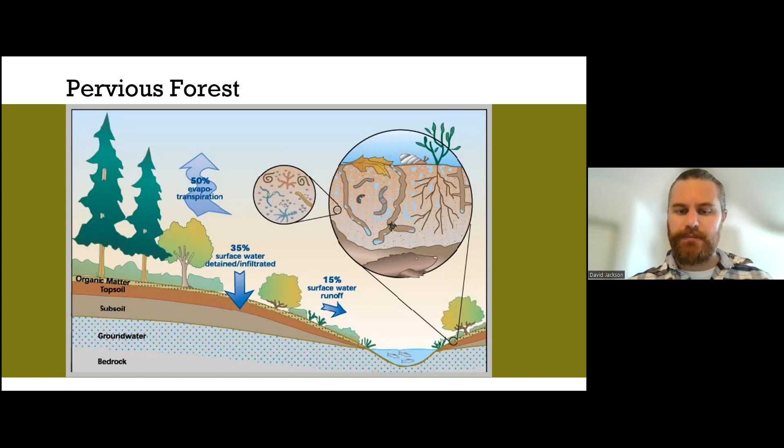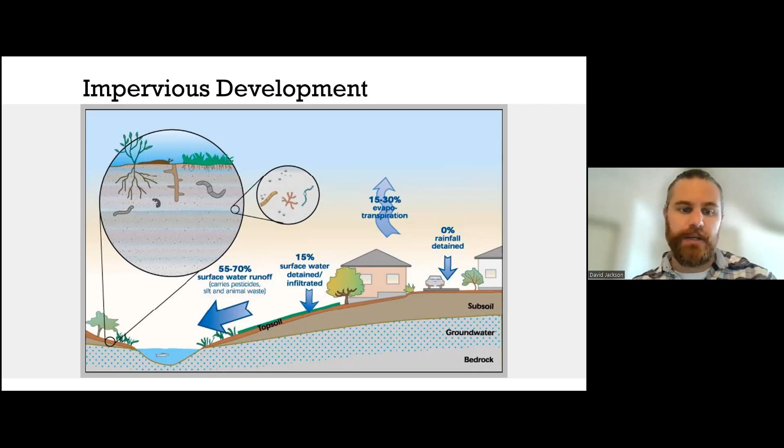Water's supposed to go in rivers. Why is that an issue? Well, when rainwater in particular falls from the sky and flows into and is channeled into waterways, that can cause a number of issues. Flooding is a big one. If the groundwater isn't holding that soil, if plants aren't holding that soil, it means that a lot more water is going into those waterways.

And if those waterways become full, and by full we mean either overflowing themselves or at least as high as the outfall, meaning the water level is above whatever pipe is putting stormwater into it, you have systems back up, you have flooding. We've had one of the wettest Junes that we've had recently, and part of what has been causing problems is the water has been falling in a large amount very quickly. And we don't always have the best systems to make sure that lots of water can go where it needs to go. Another issue is erosion.

Water runs over soil and will take soil with it, and will cause erosion of waterways. It will cause erosion of any other place that isn't stabilized, either through green or gray means. We like to say around the conservation district that water always wins. And if you don't believe us, ask the Grand Canyon. Fast moving water in large quantities can move a lot of soil, and especially in our developed areas, when soil starts moving where we don't want it to go, it causes a big problem.

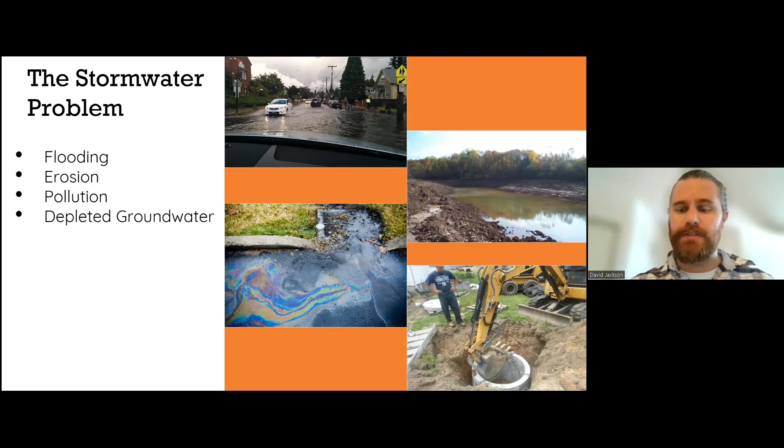And then finally, it causes an issue because if it's not going into the soil, it's depleting the groundwater. It goes straight over the top of the soil and into rivers and on its way. That becomes a real issue for people who rely on groundwater, primarily through wells, for water in their homes. Becomes a much bigger issue for things like agriculture. So stormwater is a problem in several contexts. It's not just about where it goes, it's about how it gets there. So that's where detention ponds come in.

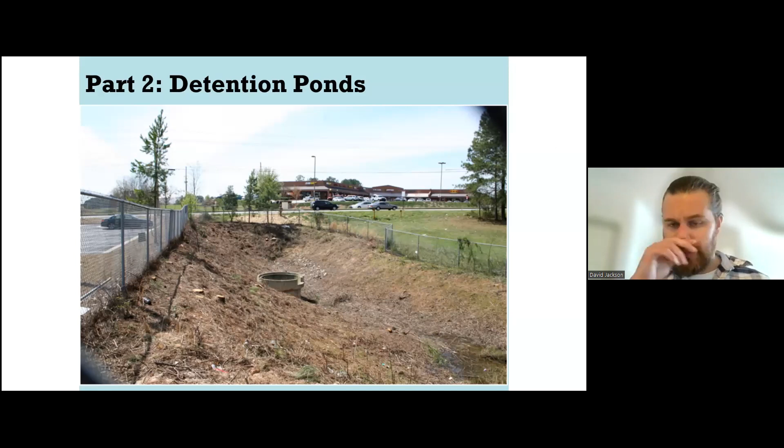Detention ponds are artificial structures that contain water. They contain stormwater, so water comes from other places, namely through what we call conveyance, catch basins, and it's put into these ponds to either be retained or detained, and eventually handled in a more natural way, which keeps these issues from happening, the flooding, the pollution, the erosion. So a quick overview of detention ponds, and the rest of this thing is going to be talking about detention ponds. So don't worry if you don't feel like after this slide you have a full understanding. We're going to talk about it at length. But some quick facts to give you some context.

There are wet and dry detention ponds. They're commonly called detention ponds or retention ponds. However, some ponds have both. They will have what's called a wet cell and a dry cell. We're going to be talking about detention and retention differently and what different levels of maintenance takes, because your pond may have both. They are part of environmental protection. They're not just things that keep water out of your way. They're also there to make sure that stormwater runoff doesn't impact the environment in severely negative ways. Treatment is part of the function of the detention pond. We're going to talk about that a little later as well.

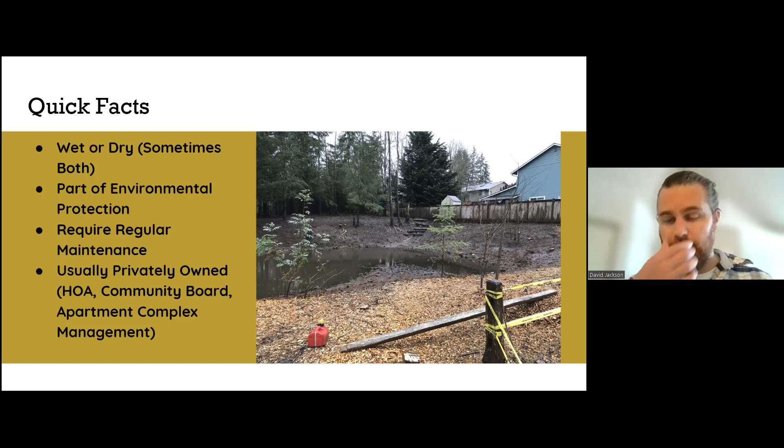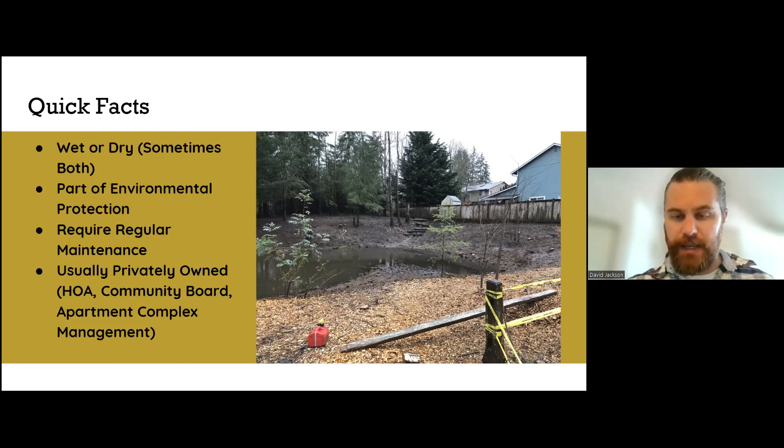They do require regular maintenance. They have vegetation. They have a number of systems that are involved in their good function. And like any machine or like any installation, maintenance is necessary. And for the most part, they are privately owned. There's a little bit of a myth that the city owns all the detention ponds. The city often will own some, but for the most part, they are privately owned, and they are built as part of a development, and then that developer transfers ownership to an HOA, a community board, or in some cases, apartment complex management. So I mentioned conveyance, so we're going to start there. We're going to start at the sort of top of the system.

Water flows into these, and then it usually settles there for a small amount of time, and then the water is conveyed through a pipe to a stormwater control facility. The reason that these exist is, one, to create the inlet to the conveyance system, but also to start the treatment process. These have what are called sumps, which is space at the bottom for sediment and debris and things to settle down into the bottom so that they don't end up in whatever the treatment facility is. These also require cleaning, but we're not going to talk about that too much today.

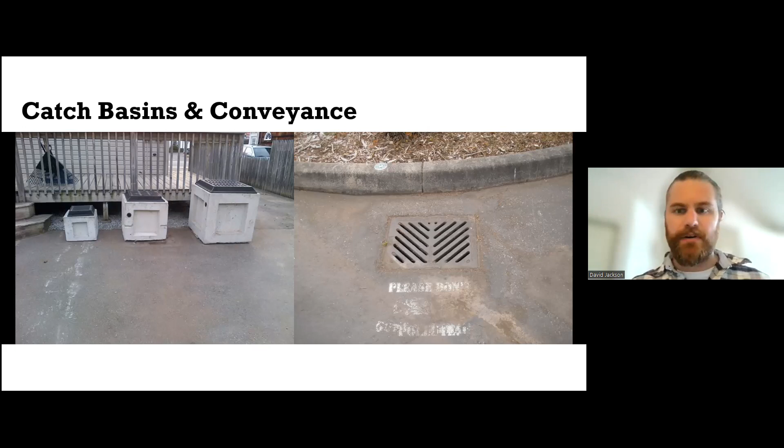But this is the start of the system. So if you're wondering, well, how does the water even get here? And you're walking around your neighborhood and you see one of these, this is where it all begins.

So I mentioned detention versus retention. We're going to talk a little bit about what the difference is. You can think about it in terms of high school, as I think none of us really do, but this is my favorite way to approach it. If you get detention in school, what does that mean? I realize you can't answer, so this is rhetorical, don't worry. Detention means that you are held after for a period of time instead of going home early or going to recess or doing something else. You are held for a relatively short amount of time, and then you're released.

That is a detention pond. This is also called a dry cell or a dry pond. Water is not supposed to be here long term. It's supposed to hold water temporarily and discharge it. A retention pond, going back to the school analogy, when they talk about student retention, they mean how do we keep kids in school long term or until they finish their education?

Retention ponds are also called wet ponds or wet cells. They are pretty much always supposed to have water. They are more like small lakes than anything, but they are still designed with capacity so that that water level will rise during a storm event, and after it dries out, will drop again. So that's the difference between detention versus retention.

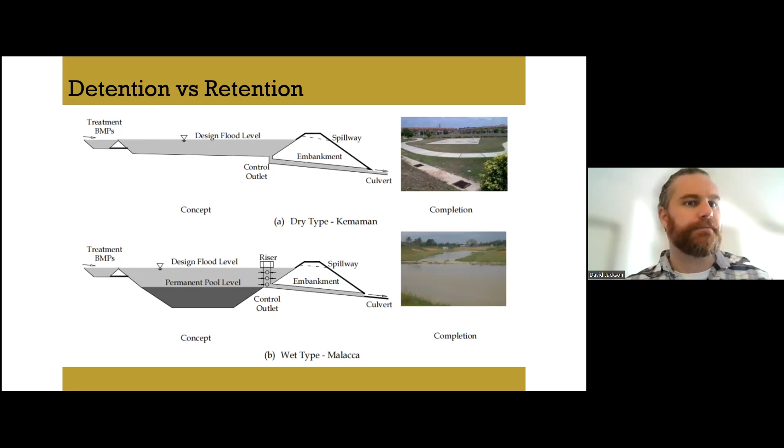So you can think, is the pond I have just keeping kids after school, or is it trying to keep kids in school indefinitely? If that doesn't work for you, I'm not going to feel insulted, but that's the way it works for me.

So since we're talking about detention ponds primarily, we're going to talk a little bit about what a detention pond is. Almost all detention ponds will have some kind of access ramp. This is required, because it is absolutely essential that people be able to get into detention ponds to do maintenance, inspections, all sorts of things. It will also have an inlet, which is where the water enters from the conveyance system, like those catch basins we showed earlier. It will have an outlet, meaning this is where water flows out.

The level of the outlet may depend on if it's an overflow or if it's intended to be constantly flowing out to a treatment facility. In some cases, the detention pond is the treatment facility, and they only have the outlet to flow out in case of a really heavy storm so that the pond doesn't get overwhelmed. It has a pond bottom, and that's either wet or dry.

Again, detention versus retention. It will have an emergency overflow, even if it has a normal outlet that is constantly letting water flow out. It will also have an additional emergency overflow that will allow it to convey more water in the event of a really heavy rain event. It also may potentially have a control structure.

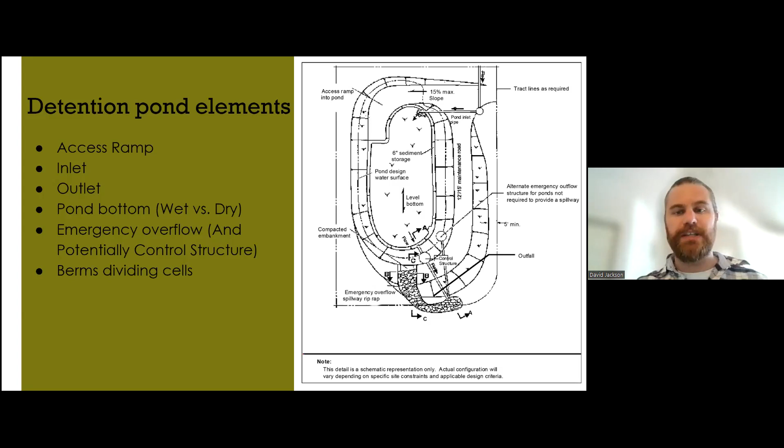If it does have a control structure, this is something that we'll talk about a little bit later, about what a control structure is and how it works. And then it will have berms dividing cells. If it's just one cell, it'll just have a berm around the entire thing. If it's two cells, a wet cell and a dry cell, or two wet cells, or however that works out, it will have berms dividing those areas because it wants to do different things at different points.

So a control structure, and this is one of those things that please do not try to catch all of this stuff. This is just an example of what a control structure looks like so you can sort of recognize one. A control structure is really there to control the outflow of water. It wants to ensure that a certain amount of water flows out if necessary, and controls where it flows to. But it wants to make sure that those more simple systems are not overwhelmed.

You do not need to know a lot about control structures, because if you have a control structure, it basically guarantees that you are not going to do the maintenance on it yourself. There's a number of reasons why that we'll talk about in the maintenance section, but recognize that if you have a control structure, you should not be messing around with it. They can be very, very dangerous, and you want a contractor to mess with it. So recognize a control structure as something that you should not go sticking your nose into.

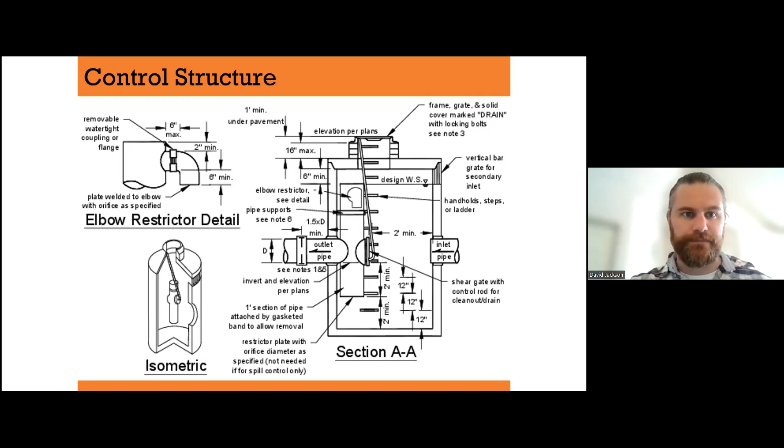Fencing and security. Fences are generally required when there is a certain slope to ensure that people don't trip or fall in. It's also, like in this case, more there to make sure that the kids don't muck around in this, and to reduce individual liability. Most places, especially developers, will go ahead and just toss a fence up around these things anyway, because it reduces their liability. It's easier than trying to fuss about how this is going to work. So it's so much easier just to go ahead and toss up a chain link fence.

This does have some drawbacks. A colleague of mine used to refer to these as, oh shoot, what was the word he used? Kari may remember. I think it was stormwater prisons, because they look like these incarceration facilities that are terrible and dangerous and off limits. That again, you kind of have to balance, like, do we want this thing to be completely shut off because it's dangerous, or do we want it to sort of look friendly?

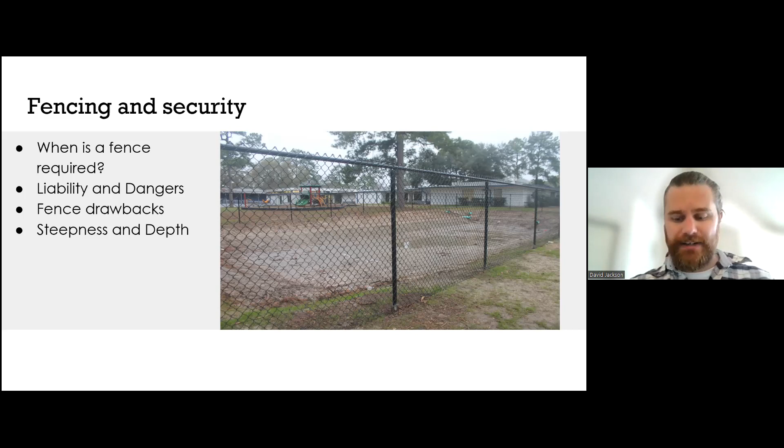I can't answer that blanket; it's really a case by case basis, and you also generally need to talk to an engineer about that to make sure that your slopes are a certain way, and you need to check your city and county ordinances to make sure that your fencing is compliant. In general, it is safer to have. In general, fences will be required because detention ponds are not playgrounds. They can be very dangerous places.

And then it will include plants. My personal favorite part of them. Again, this is nothing you need to memorize. This table that you see here comes from the Snohomish County Drainage Manual, Volume 6, which was reviewed by Ecology and I believe adopted in 2020. There are a number of different types of plants which can be used. Different than typical landscaping, they're going to be organized based on the amount of inundation, that is the amount of standing water that they can generally handle.

So up here at the top, we have inundation to 1 foot, meaning that these plants handle standing water only for a temporary period of time, about a foot up. Underneath, you have 1 to 2 feet, and below that, you have 1 to 3 feet. This is not the whole table. It goes on for a little while. But I wanted you to see an example of this so you can see, oh, I should plant these higher up on a slope, or I should plant these lower down.

That's if you're going to be planting, or having somebody plant in your detention pond. Primarily what you see in detention ponds are grasses. Some places do have trees and shrubs.

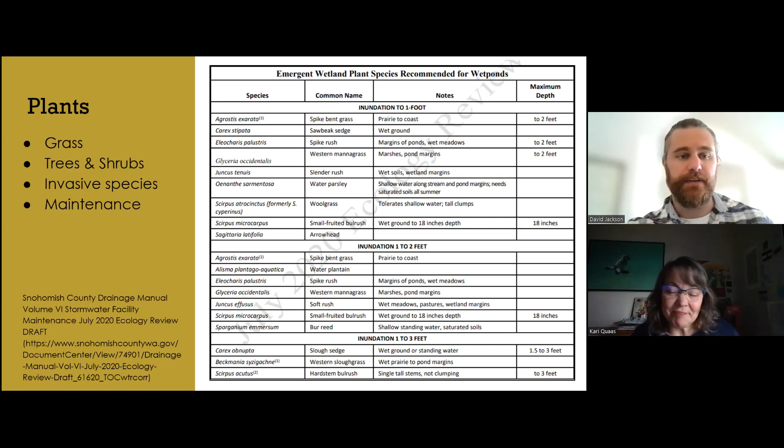Yeah. Sometimes your voice sort of fades out, like you're in an echo chamber. Okay. No, I will speak up a little bit. I apologize. That is an issue that is apparently specific to Zoom. It drops my voice if I start speaking too softly. I apologize. I will speak up a little bit more, and my neighbors will just have to deal with it. They get information as well. There you go. Thanks. So, thanks, Kari.

These are obviously issues for maintenance, including the maintenance of invasive species. If you get, for instance, blackberry, you need to consider how you are going to maintain that so that it doesn't cause a problem for the function of the pond. All maintenance is basically just about the function of the pond and making sure that it's capturing water well and allowing water to discharge well. And all of the plants, all of the things that you do to it should be in service of that.

So I'm going to talk really briefly about a couple other types of stormwater facility, just so that you can have some context for how these are put together. For instance, in the case of detention vaults, if you have a detention vault, this is not the webinar for you. We're not going to talk about detention vaults besides what we're talking about right now, and you have a very different maintenance road ahead of you. We are happy to have a separate conversation about what you need, but this is not for you.

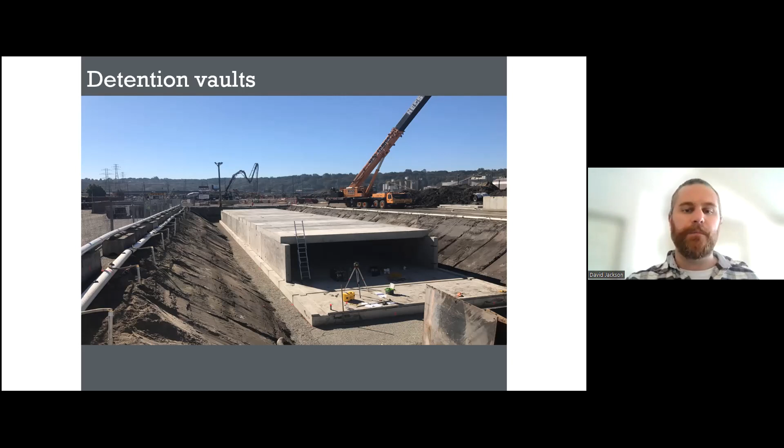A detention vault is basically like a pond, except it's buried and it's a massive concrete vault. They are usually built under parking lots or things, and they have a very different kind of function. The principles are the same, but the maintenance requirements are very, very different.

So I mentioned earlier that detention ponds were part of treatment. This is true. They can occupy different points in the treatment chain or treatment stream, depending on how the system is designed. Very easily put, if treatment is upstream, that means that treatment occurs before it enters the pond. If treatment is downstream, that means that treatment occurs after it exits the pond. So upstream means before the pond, downstream means after the pond.

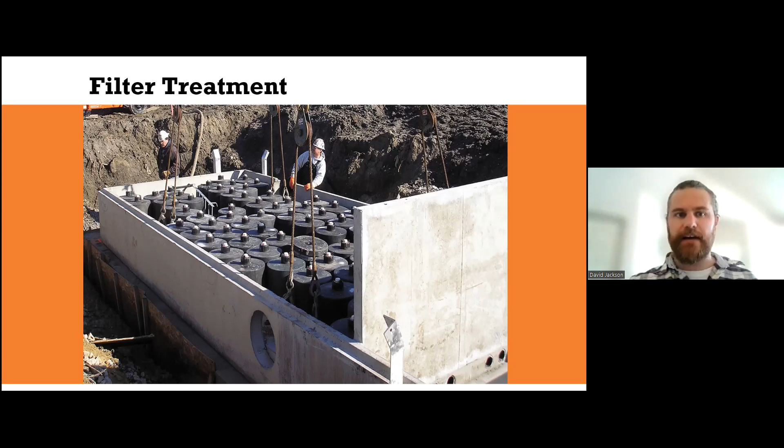Filter treatment, which can happen before or after entering the pond, is basically a large collection of canisters or cartridges that have a medium in them that trap sediment and pollution and things like that. They are good for a certain period of time, and then they need to be dug up and the filters need to be replaced. If you have this kind, there's a completely different conversation to have about how to maintain this system.

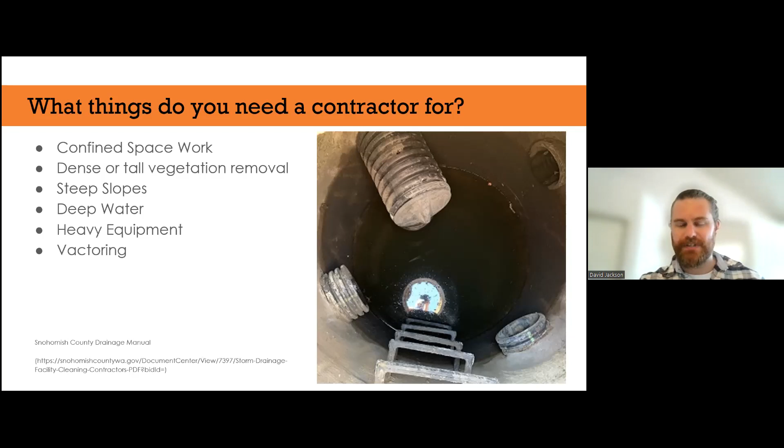Rules and regulations. There are several places that you can look this stuff up. This thing you see on the right comes from the Snohomish County Code. This is specifically the code for the maintenance of constructed stormwater facilities. You're going to find this in several different places. Again, you will have help managing this. There's no need to panic.

The Stormwater Management Manual for Western Washington is a great place for just understanding how these facilities work. The county code, which you see here to your right, the Snohomish County Drainage Manual, which I've mentioned before, and then the Lake Stevens City Municipal Code are all places that you should look up the rules and regulations. The rules and regulations are there to clearly lay out what your responsibilities are. They are not intended to be a gotcha. They're not trying to trap you in any way. And in most cases, if you understand the regulations, you'll have a much better chance of just understanding your own responsibility and working out a beneficial agreement.

Vegetation, you should be trimming and mowing, even if you just have turf grass and some other weedy grasses. You should be mowing consistently. This does a number of things, including keeping debris out of your outlets and ensuring that the pond is functioning well. You want to be taking out invasive plants. Things like blackberry, I mean, y'all know what I'm talking about. They'll grow in thickets absolutely everywhere, and it will make the function of the pond worse. And that could lead to things like flooding, system backup, all sorts of issues. And it will make future maintenance significantly harder and more expensive.

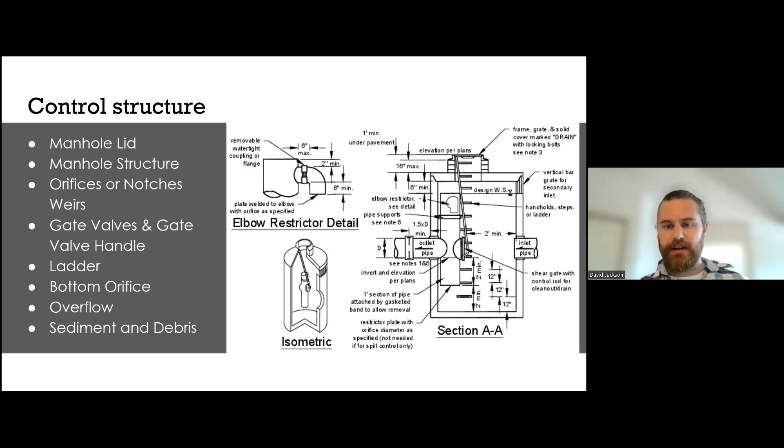Trash and debris. Debris doesn't always just come from plants. Sometimes people toss stuff in there, or sometimes very normal trash gets into the conveyance system, ends up popping in and becomes a problem. Reducing your debris, I know here that choosing your species is very important.

It's part of figuring out what plants you want to have in it. This stuff will all clog pipes and will mean that, like I said earlier, there's more chance of failure, there's more chance of flooding and backup.

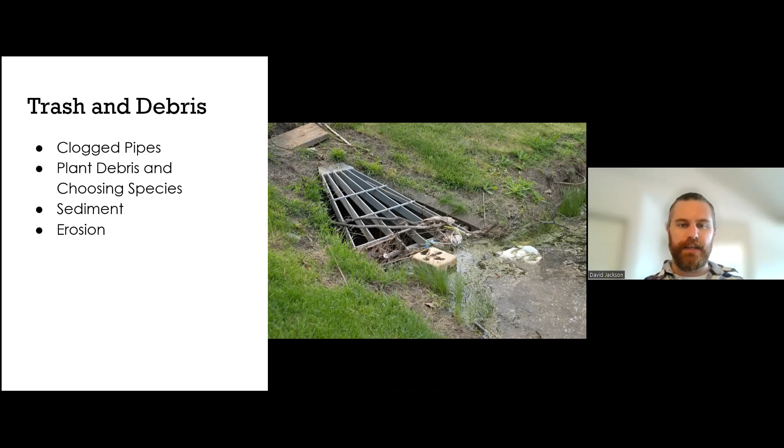Similarly, sediment and erosion. If you have not maintained the sidewalls or the berms and water is flowing in and it's taking soil with it, or a large amount of sediment is coming in and not being maintained, the bottom will slowly fill up and it will reduce the capacity of your pond. And then eventually, even for very moderate rain events, they'll back up and you'll have flooding. So you need to be also making sure that everything that should get out of these systems gets out.

Failed systems, since we're continuing on trying to scare everybody, can cause flooding if the system backs up. It can cause pollution if there's nothing in there to stop the pollution, or if they're not functioning in a way that hinders the discharge of pollution. You could have an issue downstream.

Over vegetation, this one happens often. It's usually an invasive species, but it also happens a lot with cattail, which is not an invasive species, it's native here, but they can still cause real problems. Sedimentation, loss of volume. We have this diagram here to the right. You can see sediment is kind of building up on the bottom of this pond. As it continues to build, the volume of the pond will actually decrease.

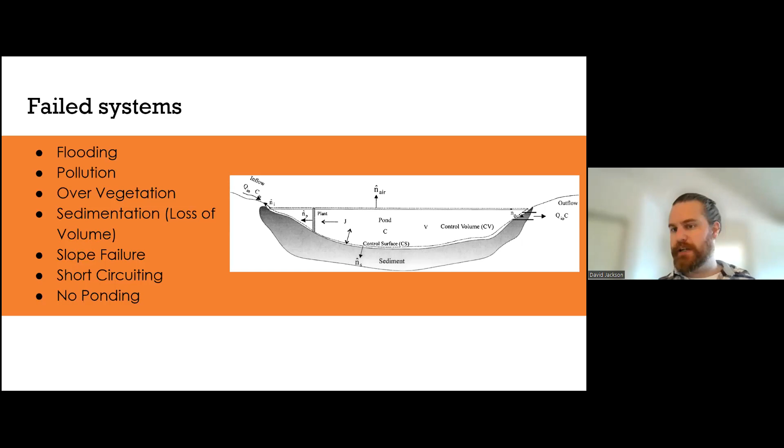Slope failure, this is part of erosion like I was talking about. No ponding, similarly sedimentation. This also means that if things continue to fill in, basically you won't have the capacity to store water anymore. And short circuiting is basically where the pond doesn't allow for water to be retained, so it moves through extremely quickly, and then the pond isn't fulfilling its function.

So inspection. Hopefully, now that I've scared everybody with how bad this stuff can get, that will impress upon folks that inspection, reporting, and documentation are very important. Contact the city. You've taken the first step by showing up here. That's great. Talk to John, talk to Shannon, and just kind of get into the flow of when they're going to come out, what you need to do, all that kind of stuff.

Maintain a schedule. Maintain a schedule for inspection with the city. Maintain a schedule with your HOA, maintain a schedule with maintenance contractors or whoever's going to be doing the maintenance. Once you get into a routine, it makes things significantly easier.

Keep notes, keep good notes of when stuff is done. If a maintenance contractor comes out and says, oh, we did all this stuff, but next time we might need to do this, keep a note of that, and that will help you remember, like, oh, next time we'll have a little bit more expense because we'll need to do this. Or if we do this, then next time we won't have to do this, so on and so forth.

Take photos. Take photos often of it in different states. Take photos after a heavy rain event to see how it works. Take photos in the middle of the summer. Take photos in different conditions. Take photos when there is a problem, when there isn't a problem, and just stick them into a big shared folder that other folks on the HOA committee or apartment building committee can access and use for different things. And then keep existing reports and plans.

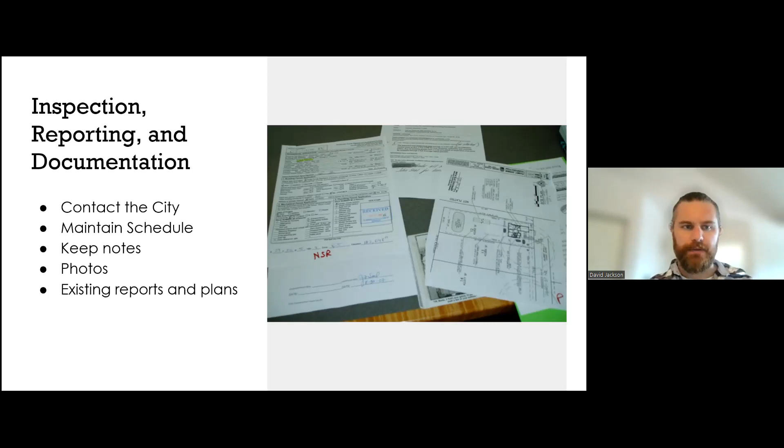So talking about budgeting, and I'm going to move through this part relatively quickly. Typical costs for wet ponds are between about $17.50 to $35 per cubic meter, which comes out to about 50 cents to a dollar per cubic foot. For dry ponds, it's about $10 per square meter, or 30 cents per cubic foot, or about $5 per square meter for larger ponds, 15 cents per cubic foot.

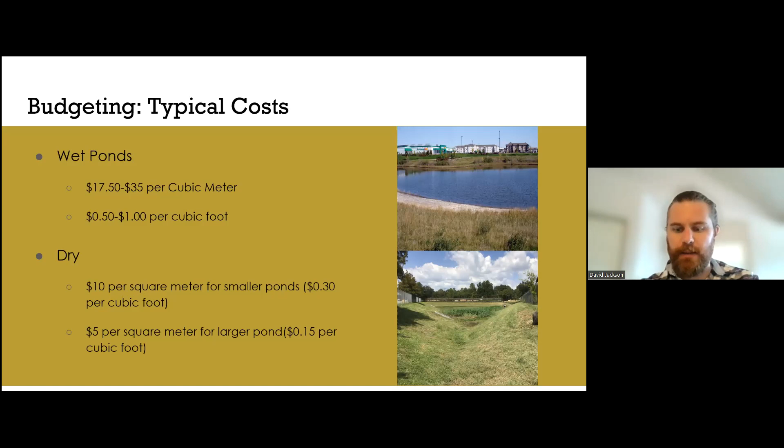It matters how large the pond is, basically, especially for dry ponds. So I say that, and you say, okay, but I don't know how large my pond is. Well, there's a lot of ways you can find out how big it is.

As-builts or county records or city records, depending on when it was built. Previous maintenance reports all should note the size of the pond, both in terms of surface area and in terms of cubic feet of storage. If you cannot come up with that, if you do not have those things or can't find them, go to Google Maps, draw a shape around the pond, click on the little polygon that you made, and it will tell you the area.

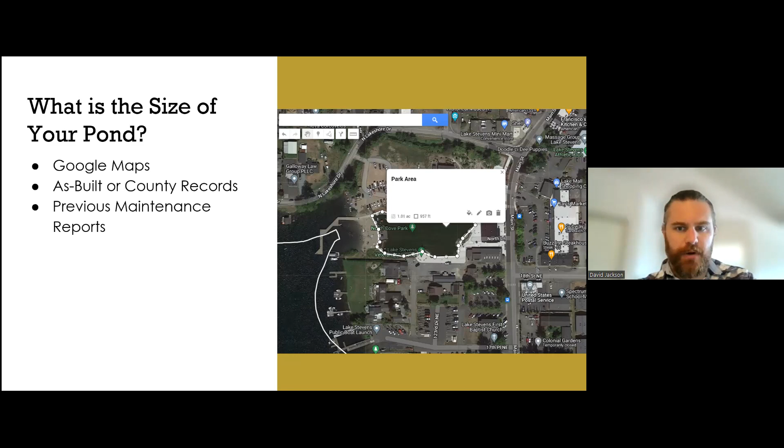Budgeting around routine maintenance. Routine maintenance can be estimated at 3 to 5% of the construction cost annually. So this is the cost to come in and do the mowing or whatever else. If you know what the construction cost was, you can get a good estimate. Mowing can be around $400 per visit, just to come in and do that. You do it twice a year, maybe 3 times a year.

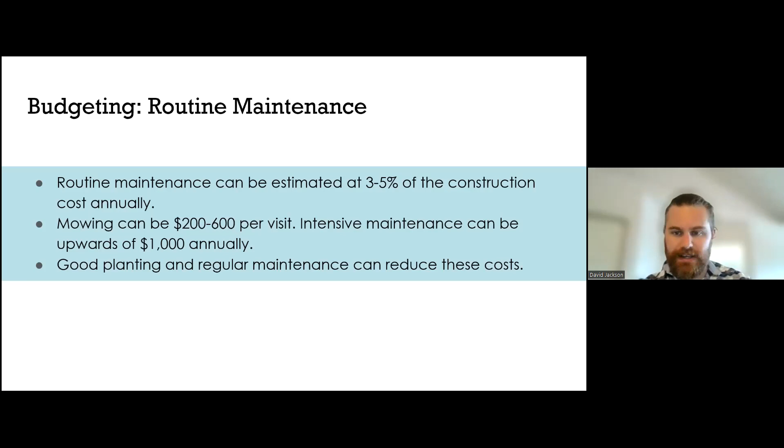If you put that off, intensive maintenance can be upwards of $1,000 annually. That is massive blackberry removal. That is, we need to haul out a ton of cattails. That is a lot of other stuff. So to sum it up, good planting and regular maintenance can reduce your costs.

So non-routine maintenance and repairs. Sediment is very expensive to remove, about $50 to $100 per cubic yard, including dredging and disposal. And mobilization can be around $4,000. Mobilization meaning at the start, you're going to drop about $4,000 just to get them out there, on top of what they're going to charge per cubic yard.

Repairing structures is highly variable. It depends on the kind of damage and what needs to be done, and will require a quote. I don't have a ballpark for you there. And repairing and dredging may require additional permits. None of us want to do additional permits. So do regular maintenance, make sure that everything is in good working order, and you can keep these costs down.

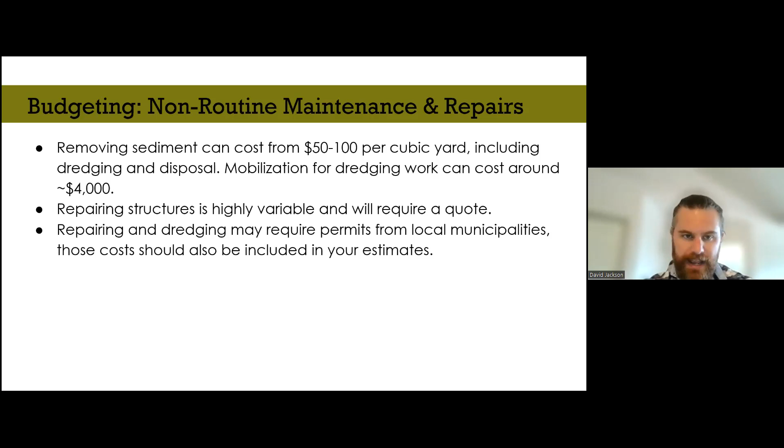Hiring a contractor. You may need to hire different contractors for different jobs. For instance, somebody may have Vactor experience, but they don't have confined spaces experience. You may be able to hire a general landscaper who's able to do the mowing, but they're not going to repair your control structures. You need to make sure that everybody is licensed and insured. You want to check their previous experience. You always want to get 3 quotes. And if possible, you want to check their references.